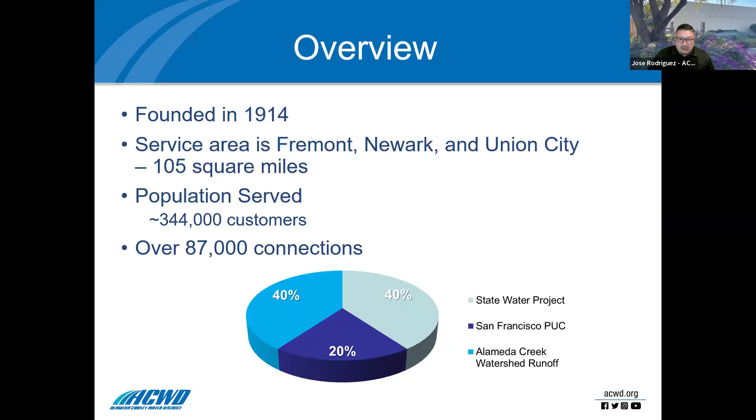40% of our water supply is imported from the State Water Project. Another 40% comes from local Alameda Creek watershed runoff that's used to recharge our Niles Cone groundwater basin, and the remaining 20% is purchased from the San Francisco PUC. Having this diversified portfolio gives us a lot of flexibility in how we plan for our water use, optimize costs, and how we can respond to operational challenges in times of drought.

Again, ACWD serves the cities of Fremont, Newark, and Union City. So if you're not in one of these cities, be sure to check your water bill to see who your water provider is, as these rebate programs that I'm going to talk about right now are specific to ACWD.

ACWD offers several water use efficiency programs that we encourage our residential customers to take advantage of. We have free water conservation kits and free water leak kits that can be delivered directly to your home. There is our Lawn Be Gone rebate program that offers $2 per square foot up to $3,000 to replace some or all of your water-thirsty lawn with water-efficient landscaping. With a minimum lawn replacement area of only 200 square feet, this is one of our most popular rebate programs. Please check it out after our webinar.

There is a rain barrel rebate. I'll be sharing more details on this one shortly. Our rebate for weather-based irrigation controllers, also known as smart irrigation controllers, is also popular. These controllers can automatically adjust landscape irrigation systems watering schedule based on actual local weather information.

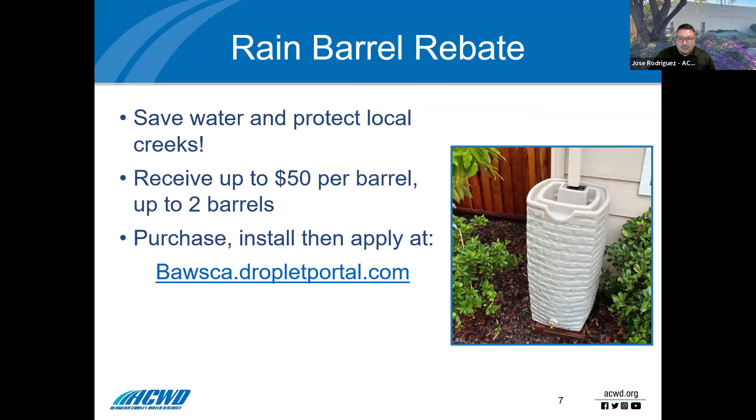Today, we are going to learn how preparing for the rainy season by installing a rain barrel can save water and protect our local creeks. And why not? You can have some fun and decorate your rain barrels for the holidays, like our spooky Frankenstein's monster here, sold separately. Our rain barrel rebate allows ACWD residential customers to receive up to $50 per rain barrel, up to 2 rain barrels for a $100 maximum rebate.

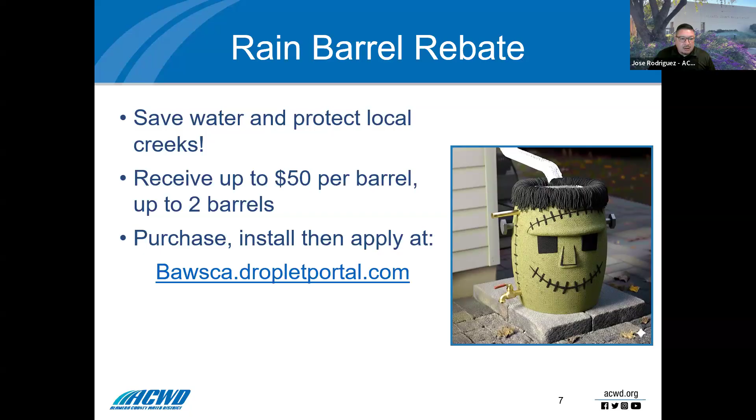You can buy a rain barrel that holds a minimum of 50 gallons, provide photos of the installed rain barrel on a flat, even surface with screening for vector and debris control, and submit a copy of the receipt showing the price, quantity, and size of the barrels for the rebate to be processed. This rebate is retroactive, so you can purchase a qualified rain barrel and then apply for the rebate at Bawsca.dropletportal.com.

Now, a little information about BAWSCA. BAWSCA represents 26 agencies, including cities, water districts, a water company, and a university that purchases water wholesale from the San Francisco Regional Water System. The BAWSCA member agencies provide water to 1.8 million people and over 40,000 businesses and community organizations in Alameda, Santa Clara, and San Mateo counties. BAWSCA's goal is to provide a high-quality supply of water at a fair price.

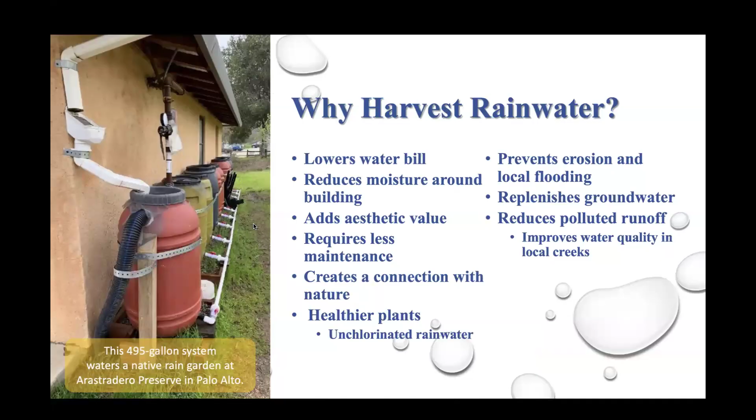One of the things we don't really think about when we're talking about rainwater harvesting is we always think about our gardens and our house. We don't really think about what it can do for the overall quality of the water in our area. So I just want to touch on that briefly, and then we'll talk more about the details on how to install a system. In a general rainstorm, we have the rain coming on all of our hardscape surfaces, and that rain runs into our storm drains.

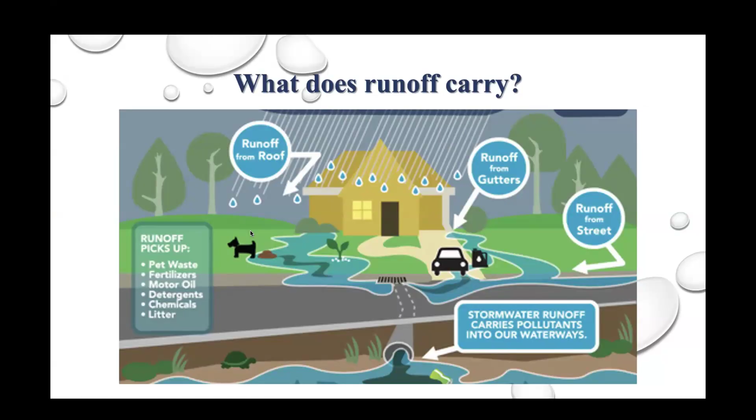And while it's running down the streets and over these hardscape surfaces, it's picking up a lot of pollutants. And so then it hits our storm drains, carrying all those pollutants with it. And those storm drains don't have any filtration system, so they go straight into the bay. So it's a little bit different when we talk about storm drains than when we talk about our household water. The water inside our house actually goes through a wastewater treatment plant and comes out clean on the other side, but our storm drains don't get cleaned.

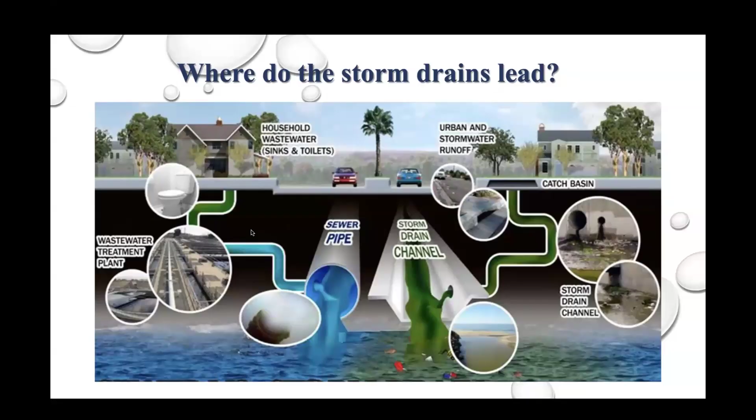So one of the ways that we can actually help clean the water in the storm drain is by getting less water going during those heavy rains and during those storm surges. And that's called slow it, spread it, and sink it. And this refers to slowing the stormwater down, allowing it to spread out, and allowing it to sink into the ground so it can refill the aquifer and percolate into our deep groundwater and come out clean into the stream by coming through the ground first.

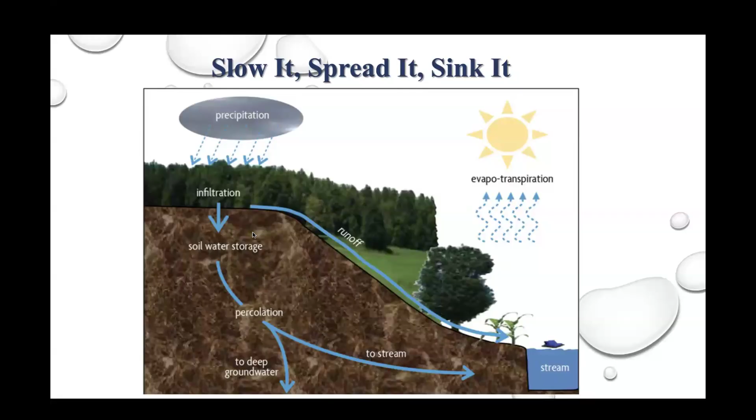And in that case, when it's sinking in, it's not picking up those pollutants. It gives us time to pick up trash and pick up things without it running down into the storm drains. So this is just another way to think about the rainwater harvesting and how it can help the overall ecosystem and not just our own house and our own community.

Now, the next question I always get is a little bit more centered on us and less on nature. And that is, is there really enough rain? We live in the Bay Area. And the answer is yes, or I wouldn't have a job. But essentially, yes, there is definitely enough rain to harvest rainwater, and it can make a huge difference.

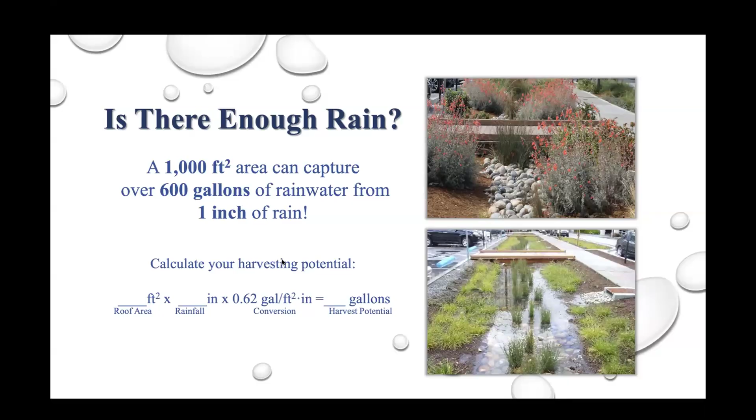A 1,000 square foot area can actually capture over 600 gallons of rainwater from just 1 inch of rain. So we're going to take another look at this equation and we're going to put in some numbers. So if we have that 1,000 square foot roof, and Alameda County gets roughly 20 inches of rain a year, which is a lot less than the national average, but it's still more than I actually thought we got in the Bay Area. That's over 12,000 gallons of water that could potentially be harvested over a 1,000 square foot roof. It's a lot of water.

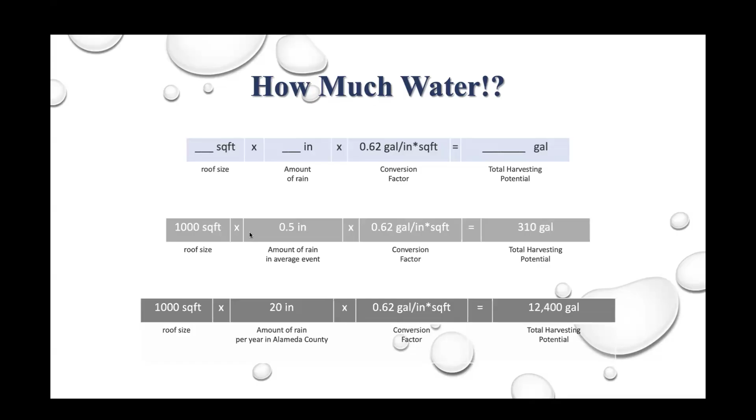And even in just a small storm where we get about half an inch of rain, that's over 300 gallons. So that's definitely worth harvesting and using in our gardens and keeping that water from flushing and filling and overpowering our storm drains. So you might say, well, I don't know if I have a 1,000 square foot roof. I don't know how big my roof is. It's okay. It's really easy to measure. You don't have to get up on the roof. You don't have to figure out what angle your roof is at.

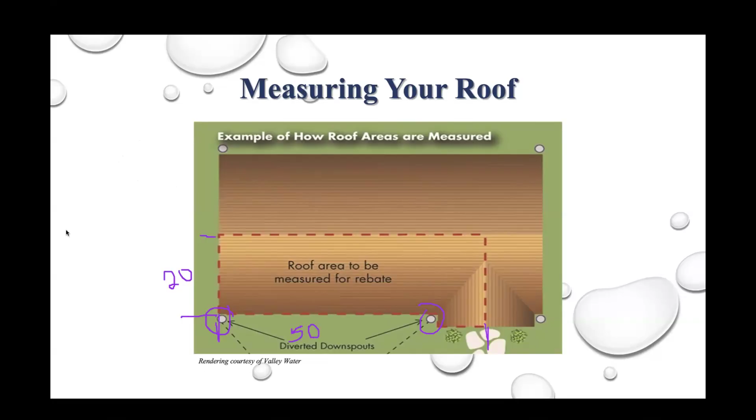There's a couple of roof types that you really don't want to harvest rainwater from, and that's going to be any sort of galvanized or untreated metal, because you're going to have those metal oxides, the rust, that's going to get into the system and concentrate. So you want to avoid anything like that.

And if you have a flat roof that was built a long time ago, you want to make sure you get it tested and make sure it's not asbestos. A lot of the really old flat roofs were asbestos based, and we really don't want to be capturing rainwater off of that. But most flat roofs today are rubber based and they're completely fine.

Most of the houses that I have seen throughout the Bay Area are ceramic or clay, or asphalt shingles. I'm seeing a lot more of the rubber shingles and the cement roofs now. These are all really great for harvesting rainwater.

When you get a new roof, however, you may want to disconnect the system for the first couple rainfalls and put an extra filter on, especially a new asphalt shingle roof. It's going to shed for the first couple of rainfalls, and you don't want to concentrate that into your tank. You want to make sure you're letting that filter out.

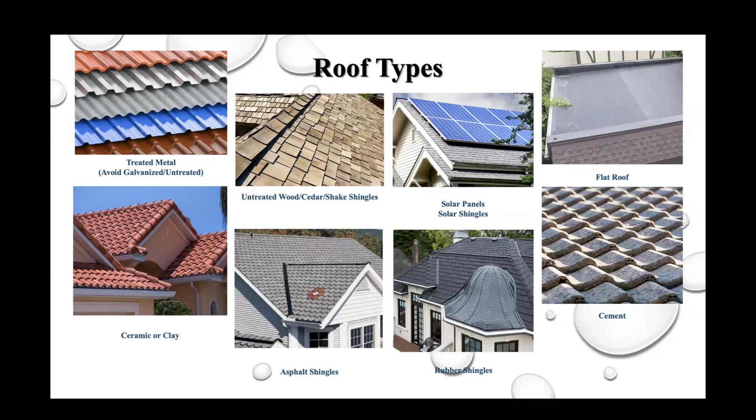And so putting a couple extra screens on can really help with that, and just cleaning that after every rainfall because the screens are going to fill up with little debris. But once it's set, the asphalt is actually inert and it's going to be fine. It's not going to get into your system. All rain barrel systems are going to be screened anyway. We're going to talk about that in a few minutes.

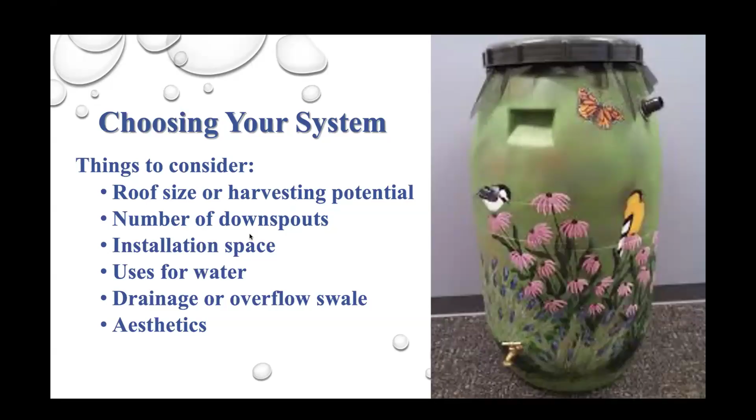And it's going on our home, so we want to make it look pretty. Some of these systems I'm going to show you, you may not think are the prettiest, but if you're artistic... I'm not. I did not do this. I pulled this picture off the internet. I think it's gorgeous. I wish I could draw like that. But if you're as unartistic as me, you might have an artistic neighbor, or you can try to work with someone else who's a local artist, and they can do some pretty beautiful things on these barrels. You can also just paint it the color of your house so it camouflages it a little bit. We're also going to look at some different types of barrels that camouflage themselves better than some of these.

And because of the way water flows in a pipe, it actually will flow down the outside more than it'll flow into the center. So you capture most of the water that's coming down that downspout with this type of diverter. But once your tank is full, the rest of the water goes back down the drain where it would have gone anyway. So it's a nice way of saying, I just want to take enough to fill my barrel and I'm going to let the rest continue what it was doing. This is a really nice system for people who already have French drains or already have their downspout connected to a rain garden or some other swale.

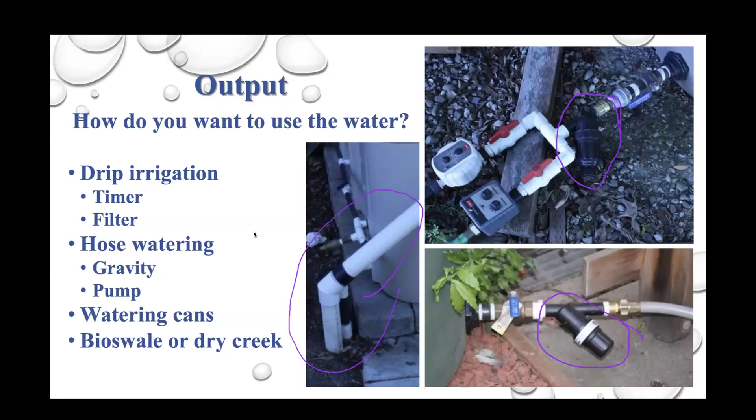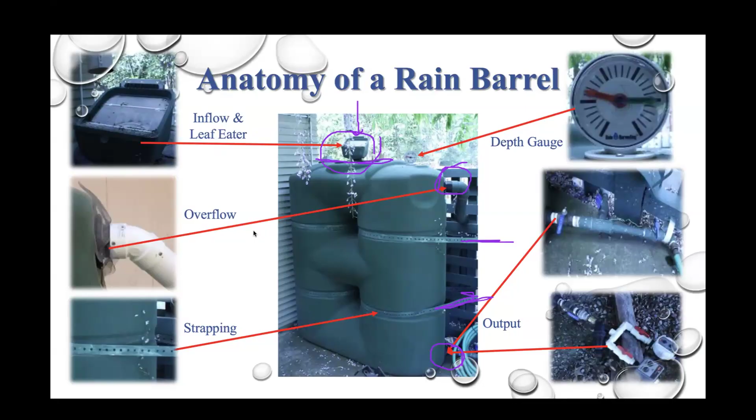Which is going to lead me on to my next slide talking about cisterns. Water is very heavy, so when you are getting into larger systems like cisterns, which are over 200-gallon capacity, you really want to think about how you're placing your barrel. And I recommend a concrete pad. The one on the right here had an existing concrete pad. The one on the left, we actually built our own concrete pad for it, which is why it's sized almost perfectly for that barrel.

And so the concrete pad gives a level of stability that you're just not able to get with dirt for a larger system. And like I said, the barrel on the right, when it's full, is over 1 ton. The barrel on the left, when it's full, is over 2 tons. It's a lot of weight when they're filled with water. And my concern, again, is always an earthquake or other natural event.

Cisterns are a great way to capture more water. Your gravity-fed systems will have higher pressure because there's more water in it.

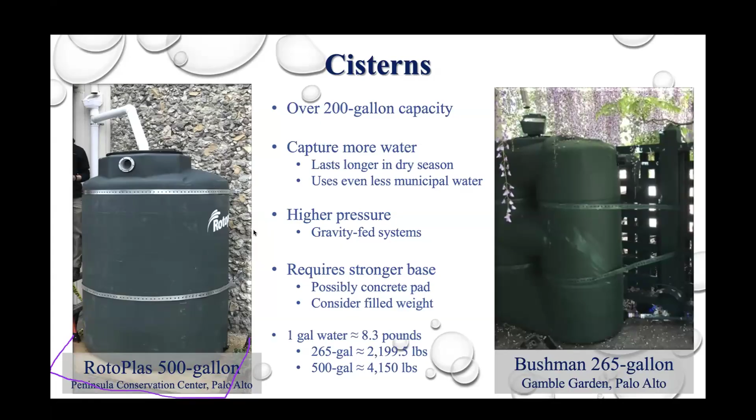And there are other ways though. If you want that 200-gallon capacity without going to such a big cistern, you can do daisy chaining. Daisy chaining is connecting barrels together. They can be connected at the base like this system, connected here at the bottom, you can see the pipe going between them. And what that means is when the water comes in, it flows into the one tank, but because the valves are all open, the water flows between the 2 tanks and they fill simultaneously. So these 2 50-gallon tanks actually provide a 100-gallon system. Again, you get the better pressure for your gravity watering, and you can use multiple barrels to bridge the gap between the downspout and the garden.

Most types of barrels can be daisy chained either at the bottom like this or underneath, which we'll see in the next slide, or you can daisy chain them at the top. So what you can do is run them in series, meaning that if the water flows into this tank, I would run my overflow from that tank into the next tank. So the first tank would have to fill fully before the second tank would start filling. And you might do that if you want all your water to be in one tank, or you want to hook up the tanks for different purposes. Personally, I tend to daisy chain at the bottom so everything fills simultaneously and I get more even water pressure throughout.

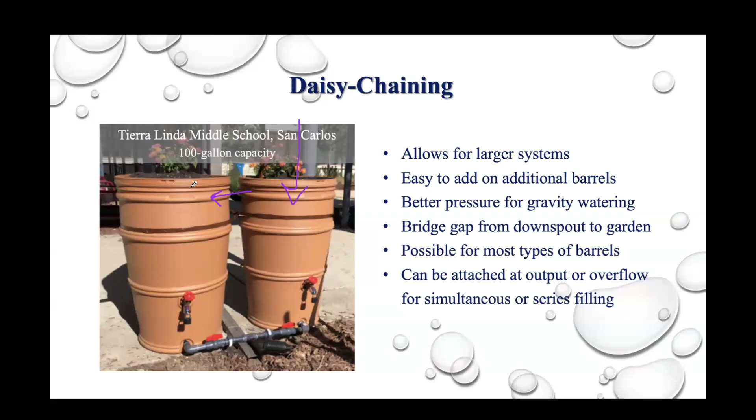This picture on the left is at Arastradero Preserve in Palo Alto, and it has 9 or 10 barrels on the system, almost 500 gallons. The downspout we're connected to is on this side of the building, and the garden these barrels feed is around the corner on the other side. By running the barrels the entire length of the building, we bridged the gap from our downspout all the way over to our garden, and we gained a lot of extra capacity since each barrel is 40 to 50 gallons. These are all recycled olive oil barrels, which can be custom painted.

Food grade barrels are great. They're only able to be used for food purposes one time by the FDA, because it's regulated to make sure there's no cross contamination, so they can't be used a second time. So a great way to give them an extended life is by taking these retired food grade barrels and turning them into rainwater harvesting systems and rain barrels.

On the right, these are Blue Barrel systems, plumbed underneath so the pipes come out the bottom. You can buy them through Blue Barrel Systems as a kit or as an individual barrel. Blue Barrel is a company based out of the Bay Area. They now sell nationally, but started in the Bay Area to help support the Bay Area drought tolerant landscape needs. There are pickup places, the closest being Hayward. The Hayward site has barrels that previously had grain alcohol in them, so they're really nice and clean - can't get much cleaner than that.

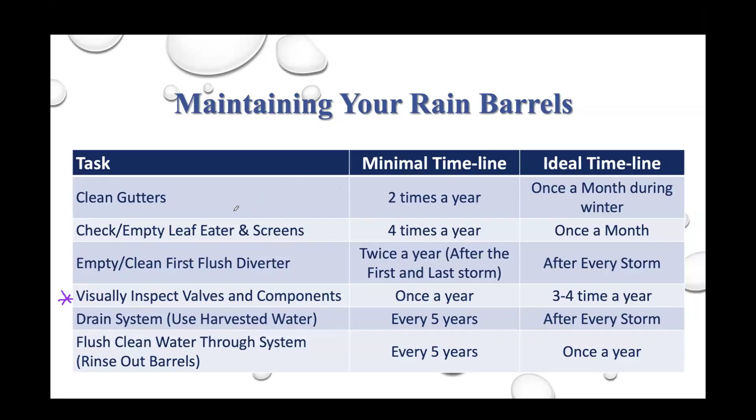Most importantly, just use your rainwater. Definitely get that water into the ground, however you want to use it. We've already talked about ways to use it, but just remember to use it. Don't let it just sit there. It really is great to use it between storms and let it fill up again.

Oh, I got a good question here, which I missed a little while ago. Sorry about that. Is there a permit required for a solar powered pump? That actually, you've got me. That's the first time I've ever been asked that question, and I don't know. The way the plumbing code is written, it specifically says hooked up to electrical. I mean, technically there is electrical in a solar powered pump, but I don't know where that lies.

I'm sorry, this is the first time I've had that question. I think that would be a good one to ask when you're doing the install. You can ask your local city, and chances are they won't know either. But hopefully they'll give you a definitive answer as to whether or not they want you to apply for one. Sorry, I can't answer that one a little bit better.

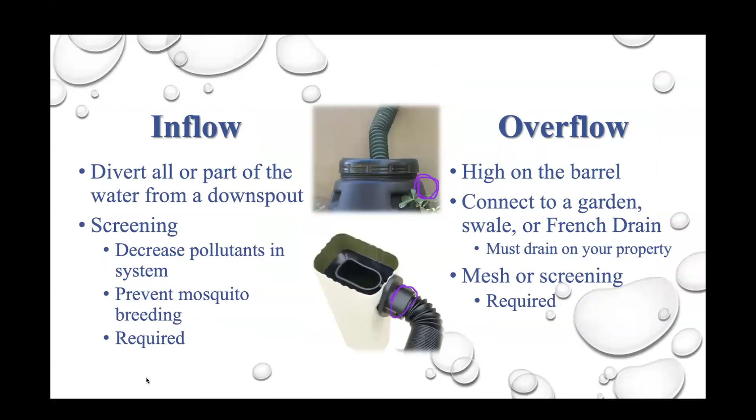And then, actually, all of these have full diversions. Then we looked at this one, which was the partial diversion. So instead of cutting the pipe, we just drilled a hole in the downspout to connect it. This comes with a kit. You just drill the hole and it'll connect into the system, which is how this one's connected. But unfortunately, the downspout is behind this bush, so we can't see it.

There's a question for pictures or links on how to install it. If you buy a kit, it will come with all the instructions for installing the partial diverter. And almost any barrel you're going to buy is going to come with instructions. If you're going to fully cut your pipe, you're going to have to decide how you're modifying it. My favorite way is a leaf eater like this, and then running a pipe into the barrel. But any type of barrel is going to have a different type of connection.

I've got 2 more questions to answer before moving on to rain gardens. There's a question about whether there's a limit to how much water you can collect. There isn't a limit, because you can refill the barrels multiple times, but that gets into permitting. If you're going to go over 5,000 gallons, you need a permit.

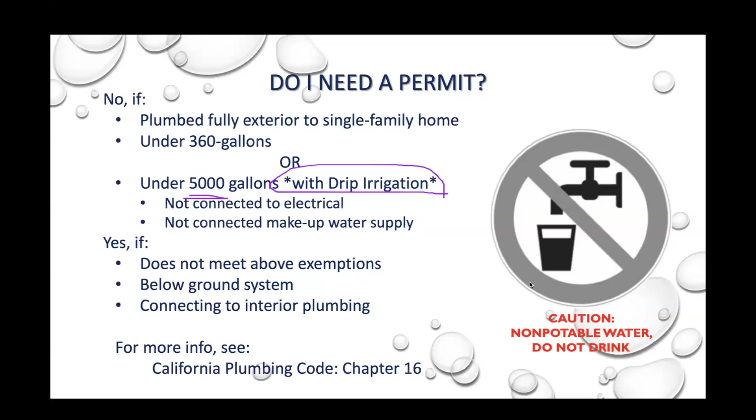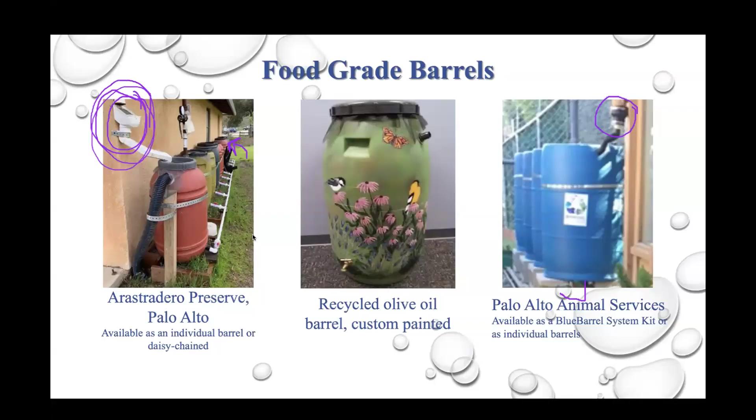The last question was about overall barrel cost. The price of rain barrels has been changing drastically in the last couple of years, as with everything else. Blue barrels go anywhere from $30 to $50 for the barrel, and then the kit can go anywhere from $10 to $30. Olive oil barrels, like these ones on the left, I haven't seen in the last year or so. Prior to that, they were like $15 to $20, but I haven't searched for them recently, so I'm not sure. The fancier the barrels get, the more expensive they get.

Ones like this can be upwards of $100 or more for the decorative ones that look like a rock. The ivy barrels, this style, can go anywhere from 80 to 150. Same thing with the earth-minded rain barrel kits. So they vary drastically based on style and where you're purchasing them from. I recommend doing a little research and comparing prices as you go to purchase them. Rebates in some cases will fully cover the cost, or in almost all cases will cover a huge percentage of the cost — rebates are really useful for this.

Okay, I'm going to move on to rain gardens. Rain gardens are designed to capture, store, and infiltrate rainwater. That means, compared to a conventional lawn or garden, rain gardens allow more water to soak into the ground. Typically, they're designed with native soil removed or amended.

We're going to look at that traditional style as well as some less traditional styles of rain gardens. Native plants are a great way to have the garden require less maintenance and provide local habitat for local insects and birds. They're designed to only pond temporarily, so they're not a water feature — they're dry most of the time. In fact, it's really concerning if they pond for more than a day after the rain has stopped.

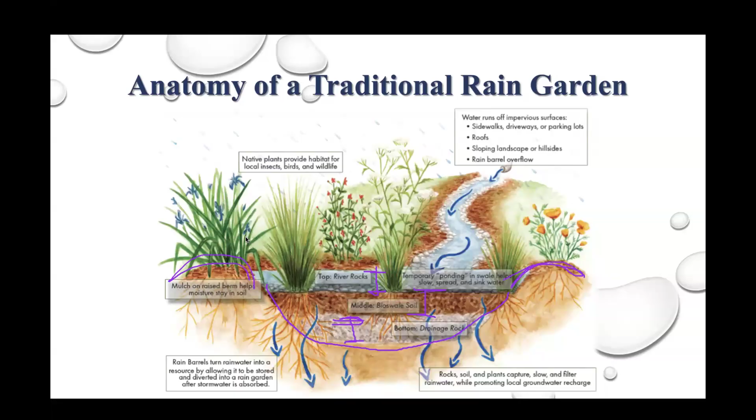When you're designing your rain garden, you want to think about the size and your harvesting potential. We're going to use that same equation we used for the rain barrels. You want to think about your soil type and the soil infiltration rate, and where you're going to put it.

We want to avoid any large existing plants and avoid any large tree roots. These are really good legal requirements that are really important: we need to be at least 10 feet away from your house and any building, and at least 3 feet away from any property line. If you have the space to go 5 feet from the property line, I recommend giving yourself a little extra buffer zone.

You want to think about what shape you're going to do your swale, how you're going to do your berms, and you want to think about your material. Like we said on the last slide, river rocks and cobbles may not be the best option for you. You might want to do mulch, or — I really like that dry creek bed look — so I like putting cobbles in mine. And then you want to choose your native plants.

For any of the rain garden rebates, native plants are required. BAWSCA has a really great list, which is going to be in the follow-up resources email — it's this very extensive Excel sheet with a lot of plants on it. If you go over to the different columns, there's one that says rain garden. You can sort by that column and see all the plants that BAWSCA recommends for the rain garden. I also have a slide later on that tells some of my favorites.

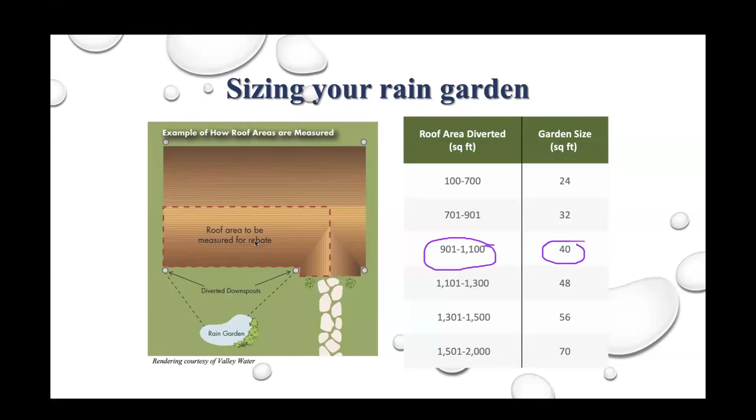When you're sizing your rain garden, Valley Water put together this nice little thing to show you possible garden square footage based on the square footage of the roof area diverted. So that 1,000 square foot roof area that I used in my harvesting potential equations — they think that a 40 square foot rain garden would be sufficient for that. This is a nice little key you can find on the Valley Water website with the suggested sizes for the rain garden.

We've already covered most of this, but we do need to be at least 10 feet away from your foundation, preferably downhill from the home, and at least 3 feet away from any property line. You want to call 811 and have them come out and mark any utilities before you dig. And you want to make sure you're at least 5 feet horizontally and 1 foot vertically away from any utilities — that includes your water, sewer, electric, and really, really important, stay far, far away from any septic systems if you happen to be on a septic system instead of a sewer system.

This is a less traditional rain garden. This is from the Flows to Bay website for their rebate requirements for the specific rain garden rebate. You can see it's still 12 to 24 inches deep, but they just filled it with the bioswale soil — they just amended all the soil and didn't put in the drainage.

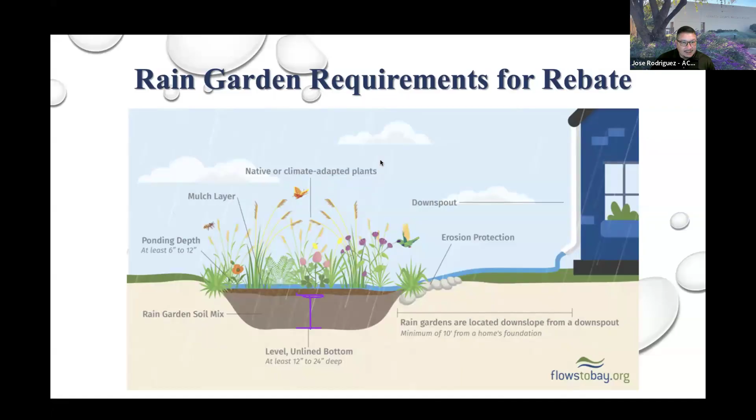Chris, I think we lost you. Not sure what happened there. Oh, Jose, are we back on? Yeah, it looks like we're connected still. You gotta love live action webinars. Okay, I'm so sorry about that. I have no idea what just happened. Okay, so I'm gonna back up just a couple minutes or a couple seconds. Hopefully, I didn't miss too much.

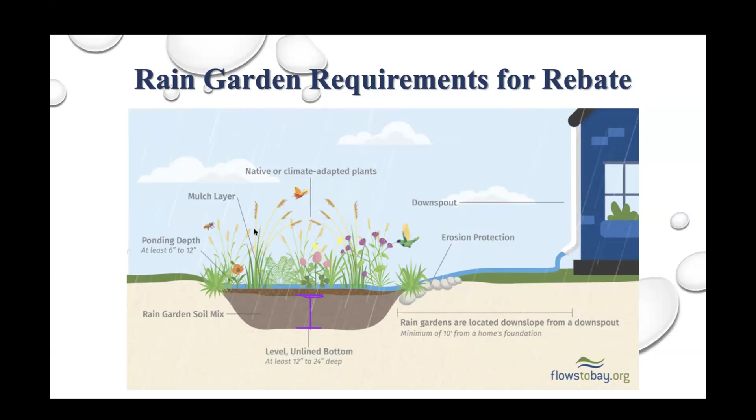So you can do a rain garden. It is completely legitimate to do the rain garden with the bioswale mixture, augmenting your native soil and not doing the crushed rock in the base. I do think long term that that's going to compact and your garden is going to not function as well. And having the crushed rock in the bottom is going to keep your garden functioning really well for a lot longer, just because it's going to add that extra airspace in the base that the water needs to be able to drain nicely.

Okay, we have a couple of native plants. I'm going to talk a little bit about plants and maintaining your garden, and then we'll take some garden questions and any more rain barrel questions as well. Sorry, when everything crashed, my Q&A went away, so I just want to make sure I've got that open.

One of the questions I get a lot, and this pertains to both gardening with a rain barrel as well as rain gardens, is can I add edible plants? Everyone wants to have a nice veggie garden. And so the simple question is no, you're not going to put these in the rain garden. You're going to put your native plants in the rain garden.

But if you want to put some veggies along the raised area, along the berm on the edges of the garden, or if you want to water some veggies from your rain barrel, you can definitely do your vining veggies that you're going to water at the roots. You can do your bushy berries, your tall and bushy herbs, your rosemary, your artichoke, any of your citrus or any of your trees. Those are all going to be great.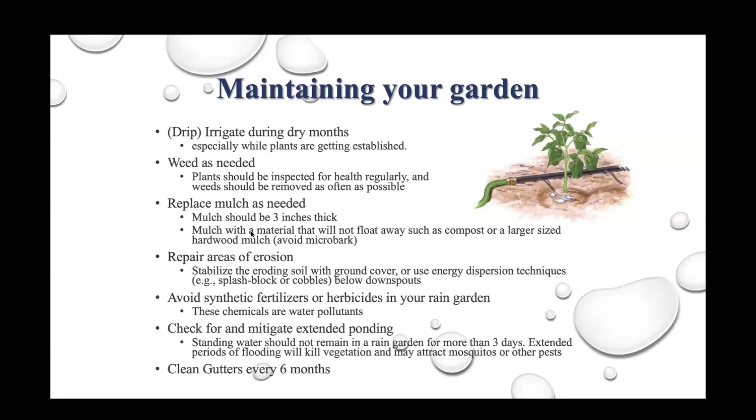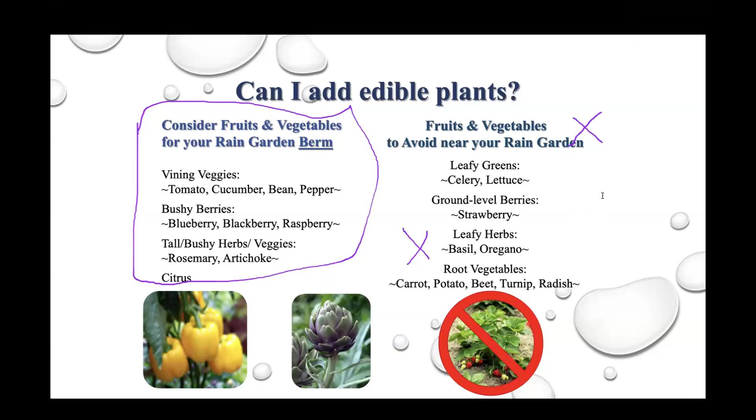I've got a question about contractors. Where can I find a list of contractors who can install barrels? That's a great question. These websites all have more information. The Flows to Bay website specifically, I know for a fact, has a list of contractors. Greywater Action may have some more information as well, but the Flows to Bay site, I know they have a site specifically for a list of contractors.

We've got a couple questions about rebates. I'm gonna let you guys take these. Jose, I'll read it out for you. Is the barrel rebate only once per property, or can a new owner claim to replace old or broken ones with new? Also, do Amazon-purchased barrels qualify for the rebate?

So what I would tell our customer here is we definitely are here to work with our customers. We would like to take a look at your site. I can type in my contact information right now. It will also be available when we send over our copy of today's webinar. Perhaps when that first rain barrel was installed, it did not even go through our rebate process. And so then I don't see why there would be an issue that we would not be able to provide the rebate. I just sent over my contact info. Please contact us afterwards. I'll be very happy to look into that. Just need your address, and then we'll take it from there.

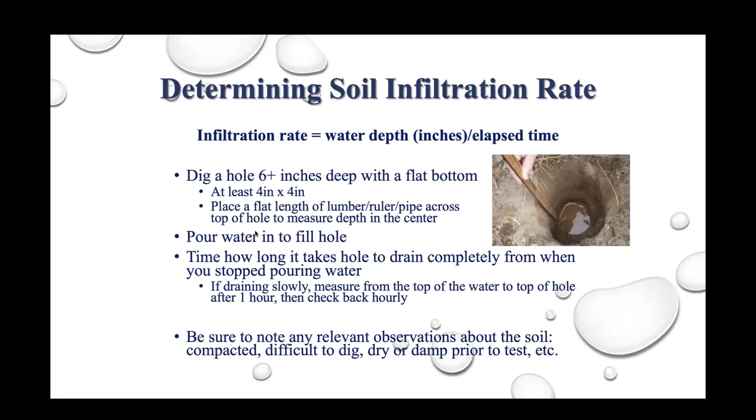So I have two more things that'll be part of the handout that I didn't go over today because they're very self-explanatory with reading them. But these two slides will be included with the follow-up email. If you are worried that you have heavily clay soil or that your soil infiltration rate might not be good for a rain garden, these are ways you can test your soil at home without having to take it anywhere, getting your hands a little dirty and playing with your soil. So these will be included in the follow-up email.

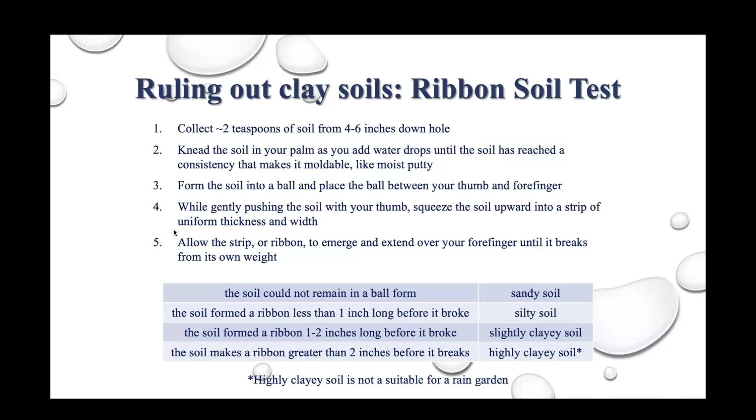Okay, David, you can unmute yourself. Okay, thank you. I just have a quick question, where can I get the kit for diverters?

The downspout, I need to modify that. Yeah, I still don't have a clear way how to do that yet, but I will do more research myself. But so where this kit will come, if you buy most of the rain barrels, they will come with the kit for this partial diverter, and they will come with instructions. So that will be included in the kit, and it'll come with the drill bits that you need. All you'll need is a physical drill, but it'll come with the drill bits to drill the hole into the downspout, and it will come with all your instructions on how to install that.

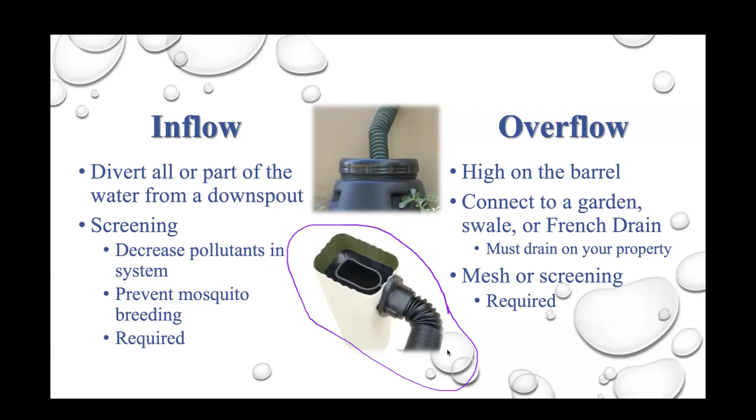But the rebate only covers the barrel, right? Not the kit, right? This is a great question for Jose, but my understanding is the rebate includes the plumbing as well as the barrel. So if you buy a barrel that doesn't include that plumbing kit and you have to buy that plumbing kit separately, you can include that in the rebate amount. But the rebate will only cover up to that certain dollar amount, so if the kit brings you over that, it won't be included. But the kit is included in most of them.

So if we look at, sorry, I'm going back to my slides. The full kit is included with, like, the Ivy barrels, the EarthMinded barrels include a full kit. Most of the other styles you're gonna find online are going to come with that kit already included.

Do you know how much for the barrel itself? They vary a lot. The last time I ordered the EarthMinded RainStation, I got it through Walmart or maybe Home Depot, and I think it was $110 and included the kit. Okay, so we can buy the barrel and the kit anywhere, right? Yeah, I would look online, there's a lot of different sites that have them.

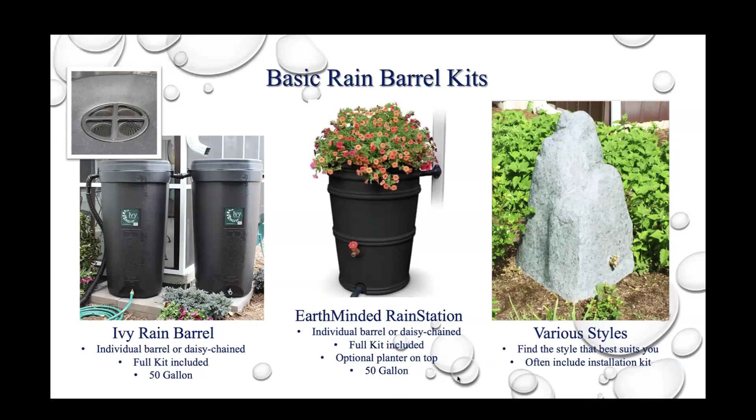Anywhere, and then we just submit to the rebate to get maximum $50 back. Yeah, what's the website? Oh, I see, the website for the rebate is in the Q&A. Yeah, okay, and ACWD, you can go through your own water district to get the rebate. The BAWSCA website has the rebate link on it. The Flows to Bay website has the rebate link on it. The Valley Water website, if you're in Santa Clara County, will have the rebate on it. So all of these websites will help you get to the rebates.

We just need the receipt, right? I think so. Of the, we just need the receipt, right, of the, we bought the tank or the barrel and the kit.

David? Yes. Yeah, for the Alameda County Water District, we do have some additional requirements. We'll require a couple of pictures of the installed barrel, and it needs to be on a level surface. You should be able to show the screening, that it's properly connected to a downspout or a rain chain. We do have some additional details required to get the $50 rebate, but you shouldn't have an issue reaching the $50 max per barrel. And again, if the kit is included, it's typically going to be just a one line item, maybe barrel and accessories or whatnot, and definitely would typically be the $50 or more. But yes, we do have requirements as far as sending pictures of it installed to the specifications.